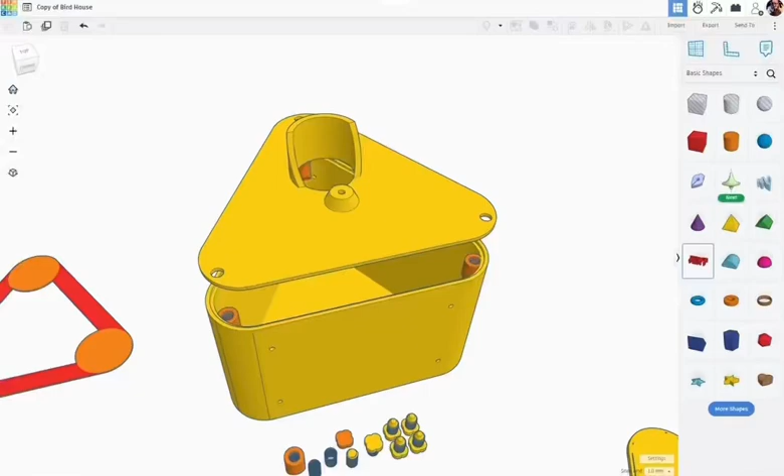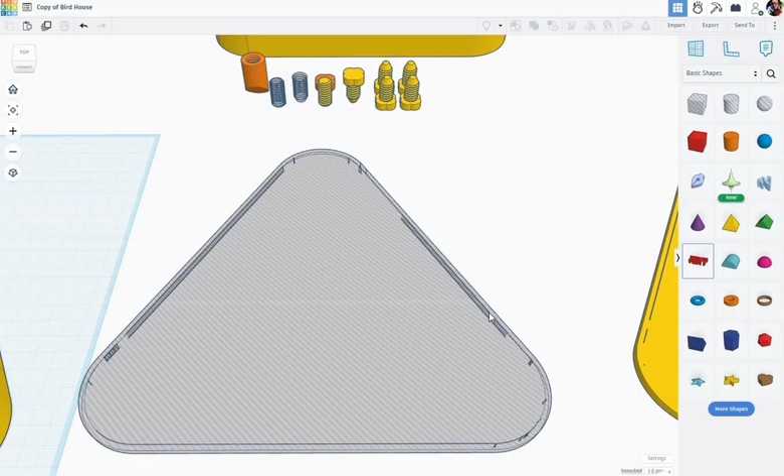This is part 2 of showing how I made this birdhouse in TinkerCAD. In part 1, we worked on these parts to cut the lip and build the front of the birdhouse. I had made this hole shape, with this outside line at 2.6 millimeters for a little tolerance, and over here one with 2.5. What I wanted to show you is that when I grouped these together, it left us with odd remnants - there wasn't a perfect overlap between the center part and the outer part. So let me show you how we can quickly address this, and it works in this particular case.

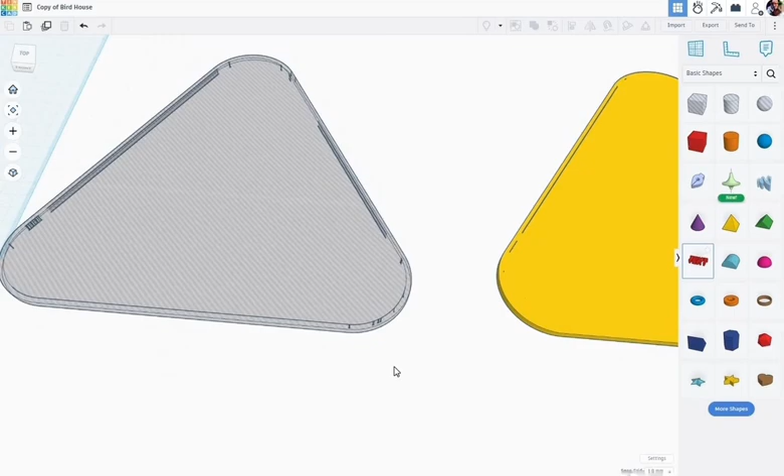Let's make sure we have this ungrouped. There we go. So we have this center part here, it's 4 millimeters in height - let's make that 4 millimeters. This is a silhouette shape. And then we have this outer line, rounded corners, 2.6 line width.

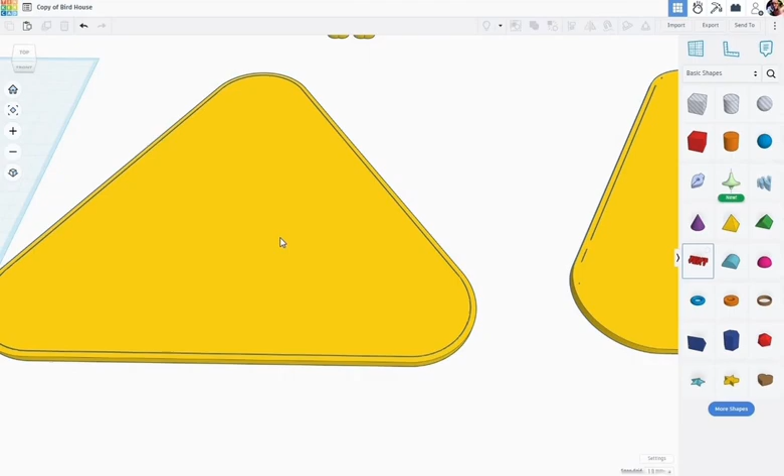To prevent that strange overlap and leaving remnants, we can make this inner part just a wee bit bigger. So I'm going to click on the center one, holding down Alt and Shift so everything gets resized proportionately. I'll click in this bottom corner, and this measurement of 230 I'm going to change to 231. I'll click back on the center again to make sure it's still just 4 millimeters.

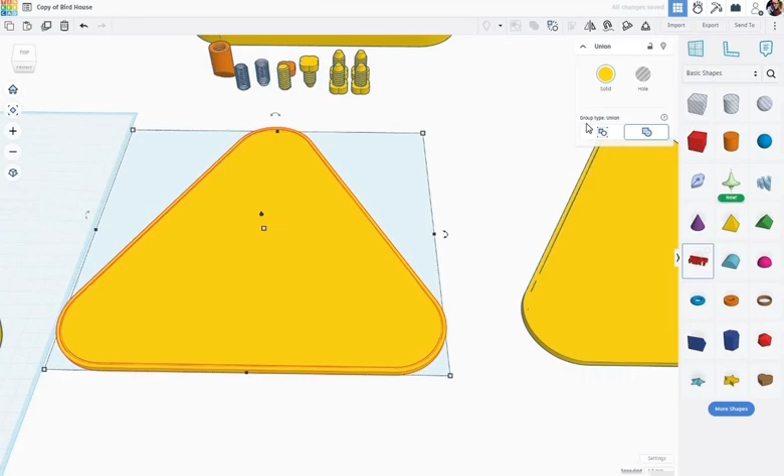I can select both of those, Control G to group. We're going to change that into a hole. That looks pretty good. We need to do something similar for this one over here.

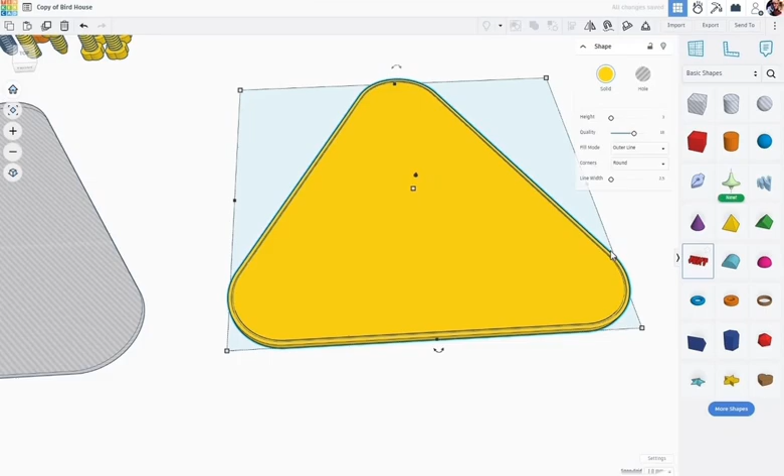Let's ungroup that. We have this center piece here, the silhouette part. I'm going to Alt-Shift resize that to 231. I'll click on this outer one here, outer line, rounded corners with a line width of 2.5. I'll make sure that center one is still just 4 millimeters. I'll select on the two of those, Control G to group those together.

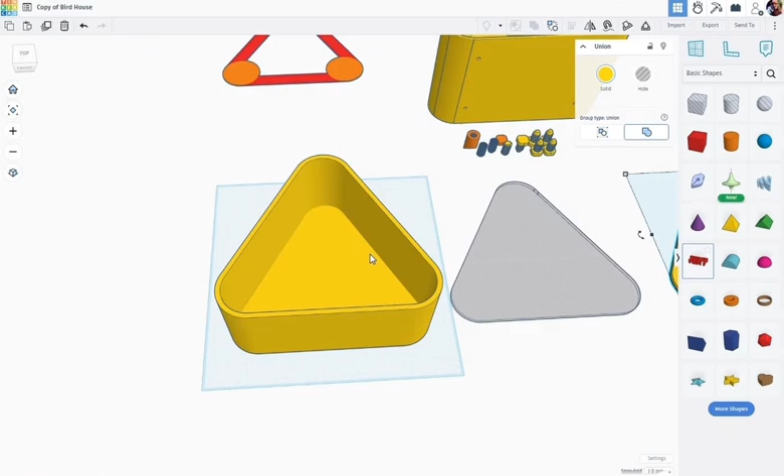Now we have our two parts that we can use to cut the lip and make the front of this birdhouse. So let's start by cutting the lip in this.

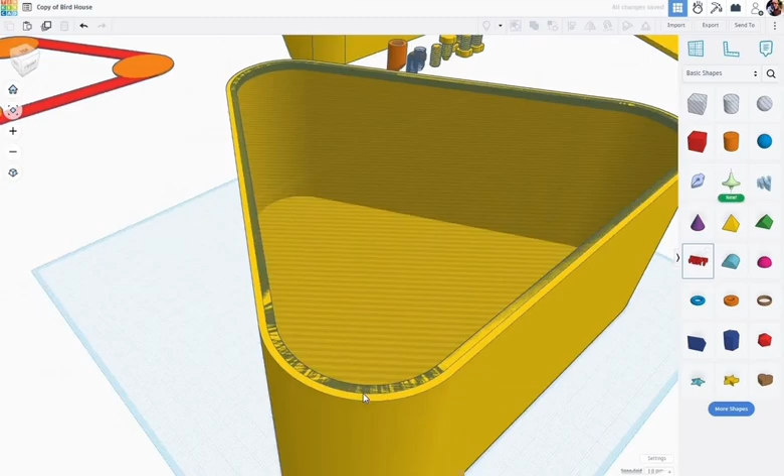I'm going to select this hole shape, Shift select on this outer wall, L for align. I'll select this outer wall and make it the master. We'll raise the height, center it in this direction and in this direction. Going to move in here - you can see how that's going to cut halfway into that outer wall to make our lip. I'm going to select those two parts and union group them together with Control G. Everything looks good there - we have that nice outer lip.

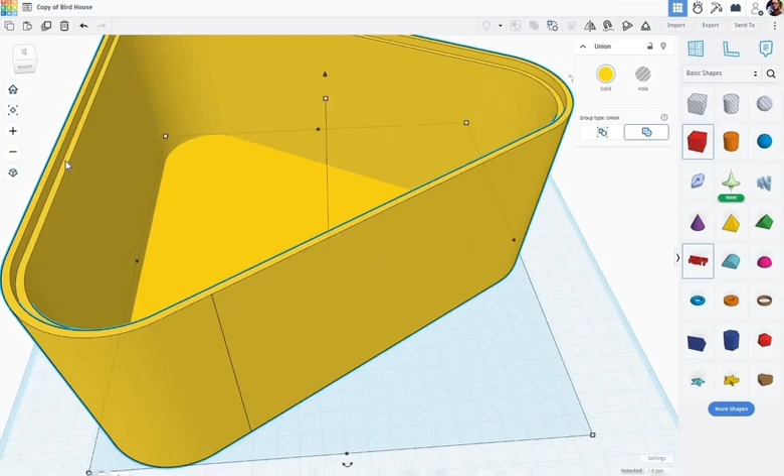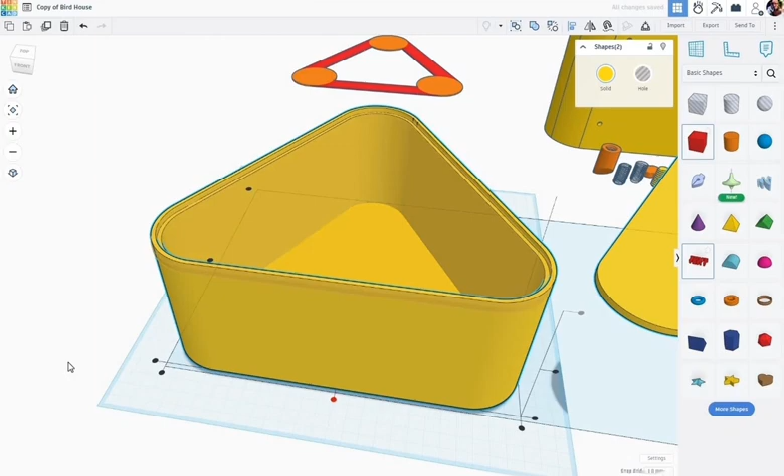Now we can take our other part over here and do the same thing. While that's selected, I Shift select this, L for align, click on the wall here, make it the master. We'll raise it up, center it in that direction, center it in that direction. Check our fitment here - let's make sure when we zoom in that we have just a little bit of a gap between those parts. You can sort of see that gap there, so when we print this it should still fit.

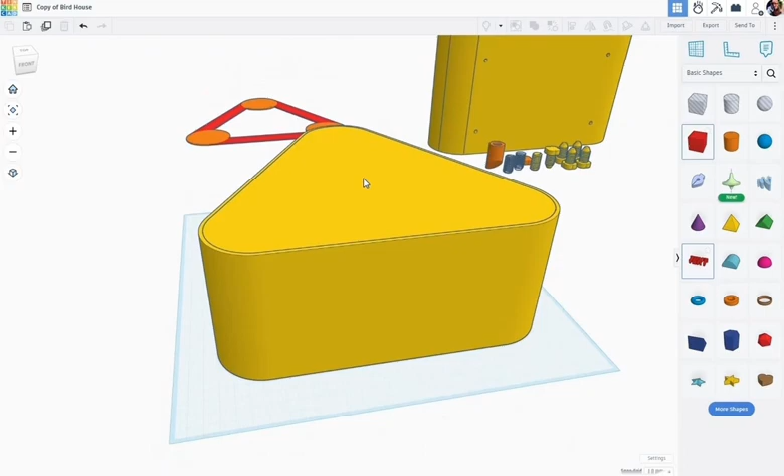We can go ahead and click on that. For now, we can raise it up.

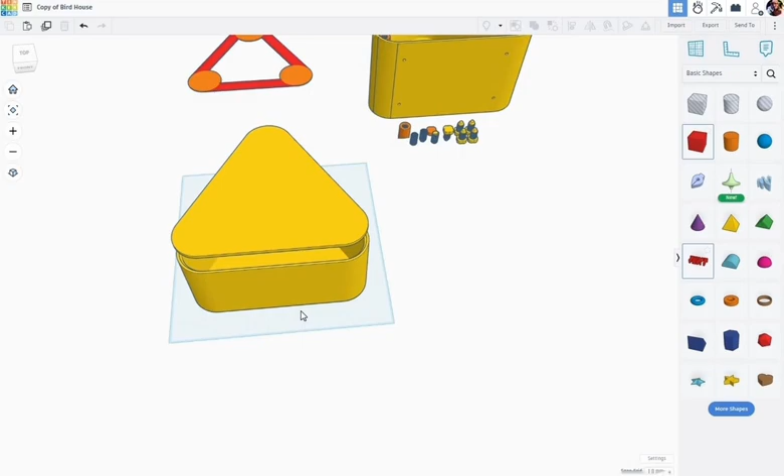The next thing we need to make is the drainage holes at the bottom here. You can see these back here, these small drainage holes. And up at the top, I also have some small holes that can be used to put wire through to hang this from your tree or whatever you're going to hang it from. So let's zoom in here and bring out the hole cylinder.

I'm going to Alt-Shift click on one of the corners. Let's make this about 3 millimeters. Let's upsize it a little bit.

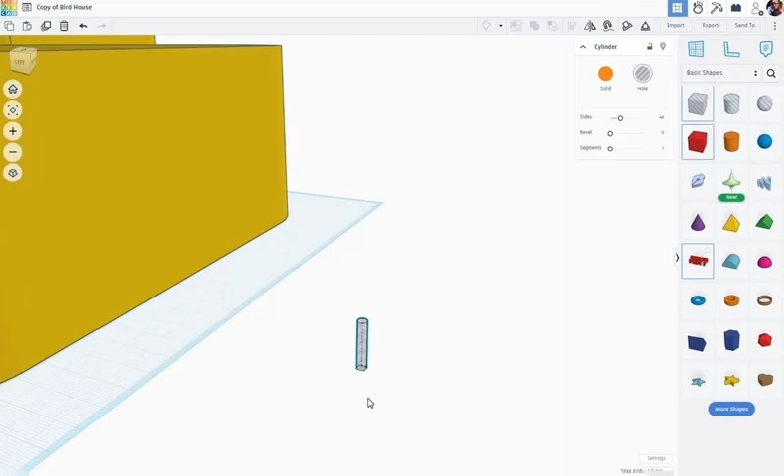Come to the side. We'll click on this rotation handle, and holding the Shift key to keep it at 45-degree increments, I'm going to roll this over to 90 degrees.

Now we can take and drag that over here to our box. Kind of get one of them started where we want it to be. Let's bring it up a bit. That's pretty good.

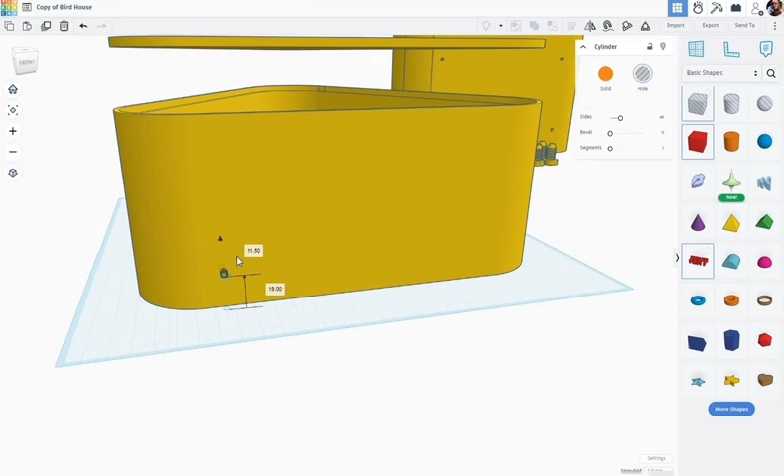Control D, let's make a duplicate of that. I'm going to shift nudge this over to right about there. Now, to make sure that these are evenly spaced between the two sides, I can select this other one, shift select it, and for now I can do a union group. Control G.

I can shift select on the wall, L for align, click on the wall to keep it the master, and bingo bango, those two holes will get centered.

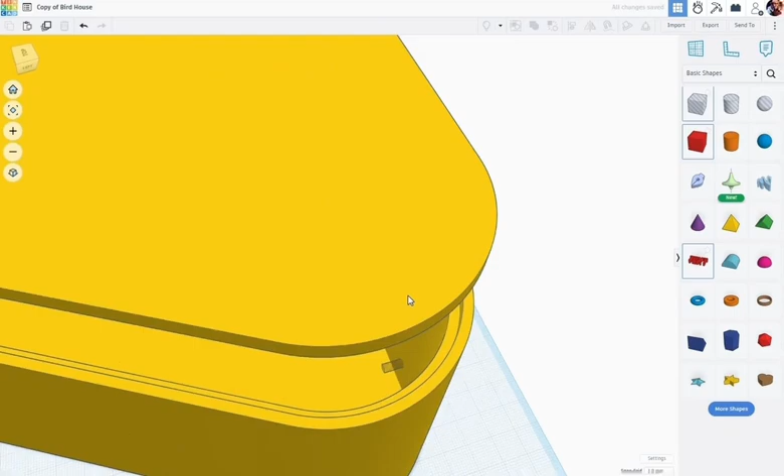There we go. I can click on those holes, Control D to duplicate. Holding down the Control key and Shift, I can nudge the duplicate up a bit. So let's say right about there.

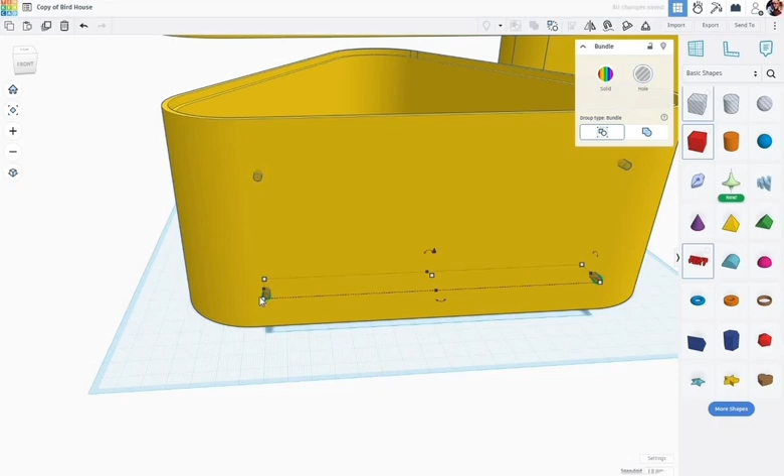Okay, let's make another duplicate of those, Control D. Let's drag those off to the side. We'll use these on the top. Oops, let's undo that.

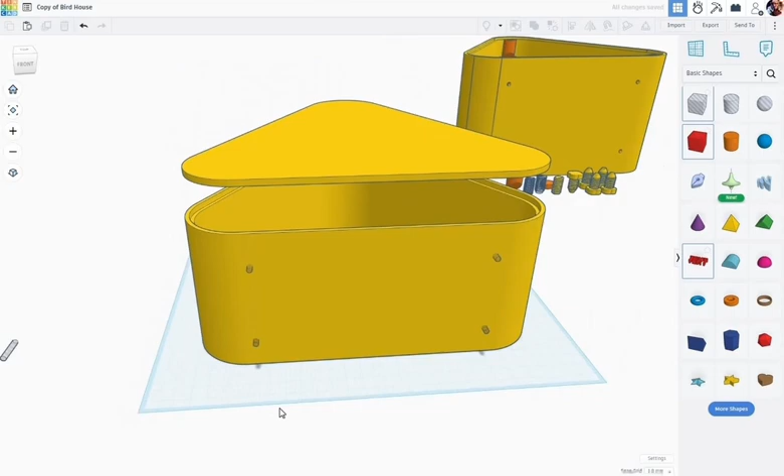Let's ungroup these. Select one of them here. Let's get rid of that. Now we have this second one over here that we can use to go around the top of our birdhouse.

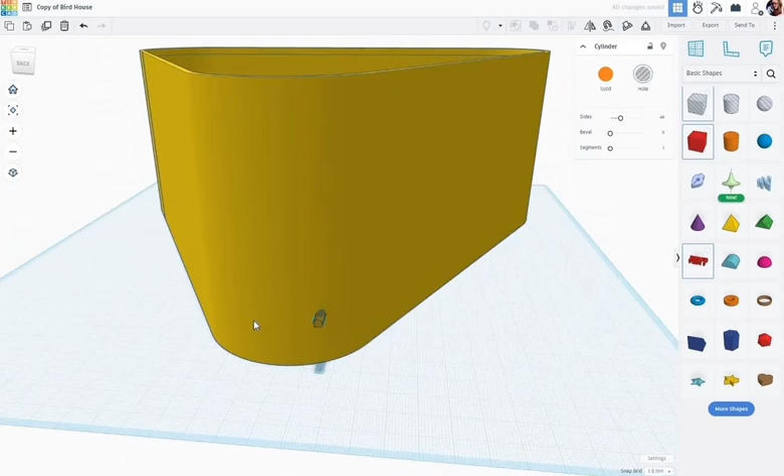Oops, we don't want to do that. Let's shift nudge this over. Zoom in here. Let's get it about where we want it. That should be good.

I'm going to make a duplicate of that. Control D. Shift nudge it over a bit. Get a rough idea where we want that.

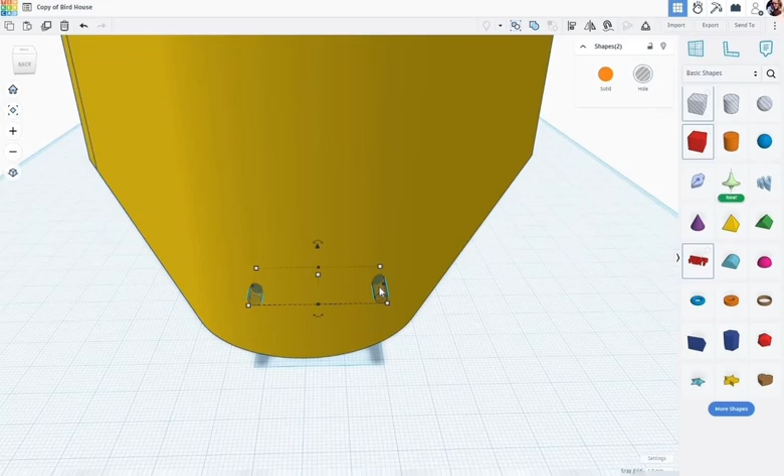Just like before, I'm going to shift select the second one. I'm going to bundle group, Control G. Then I'm going to shift select on this outer part of it here, the shell. Click on alignment, or L. Click on the wall to make it the master. There we go. We got those aligned down the center.

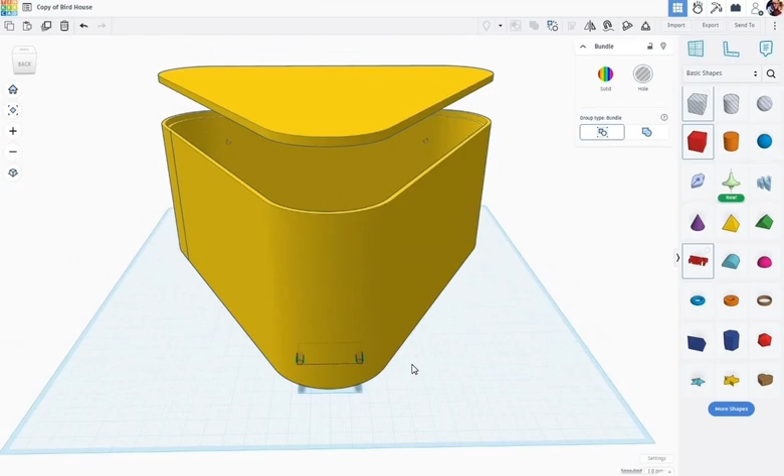Do the same thing here. Let's Control D duplicate. We can bring these up to where we want them. Now, remember that we're going to have a screw hole up here and a screw in the middle of this. So we don't want to come up too high, that it would interfere with that.

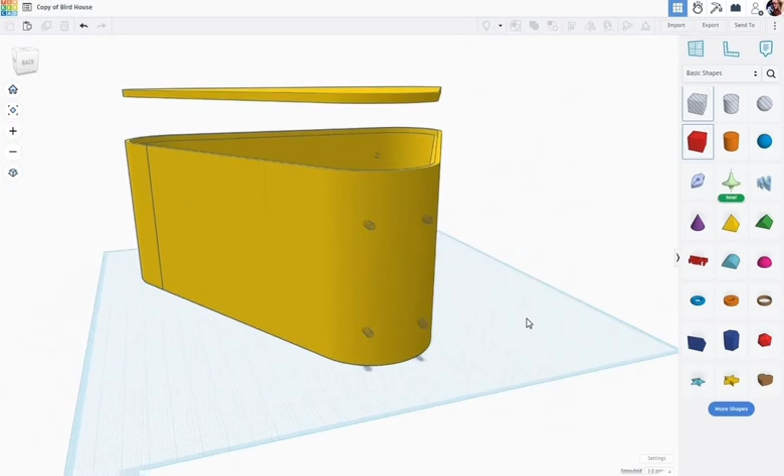There we go. So now we have all of those holes. Let's group all of that together. So I'm going to grab all of this. I have the outer wall, I have that back or bottom shape, and I have all of the holes. And let's union group those together.

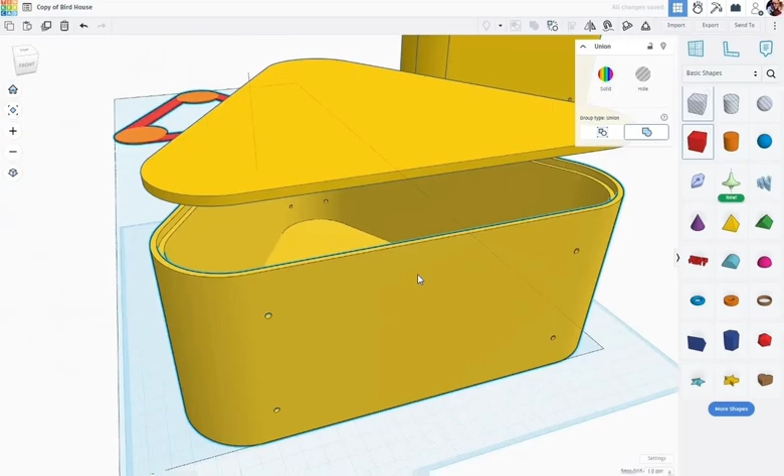Fantastic. We have our drainage holes in the bottom. We have our lip cut into the edge around here. And we have our holes in the top.

So we're at just a little over 9 minutes. We're going to continue this on part 3. Be watching for that. In the next part, I'll be making the rest of the front of this birdhouse and possibly get into making the screws back here.